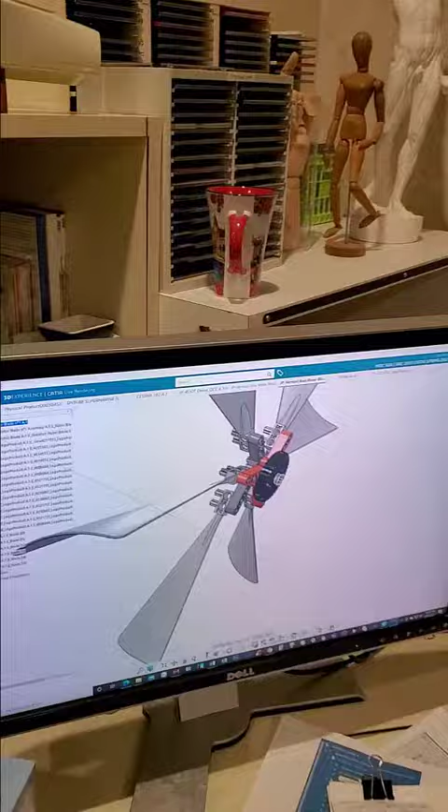I'm here with Pepe Peralta and we're looking at a propeller on Catia V6.

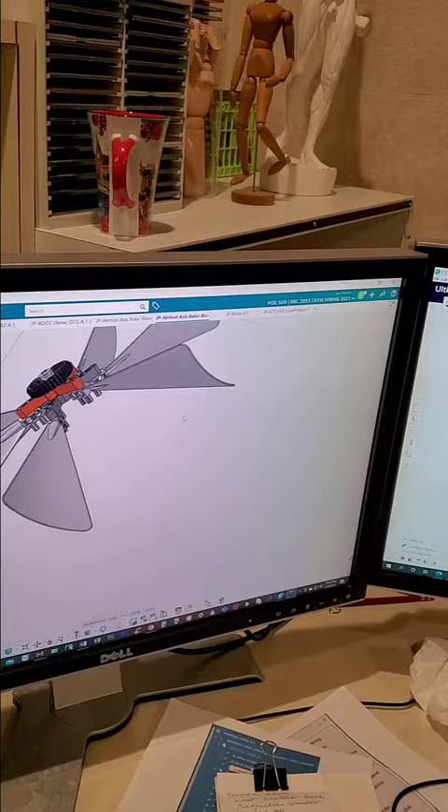We're experimenting with the process of 3D printing this propeller. Zoom in there, Pepe, so we can see the details. Nice, there's a lot of detail in that propeller.

Over here you can see where we basically exported the model and brought it into the Ultimaker Cura. And here are some of Pepe's models of his boat, so you can see Pepe is a fanatic of making models and working in 3D.

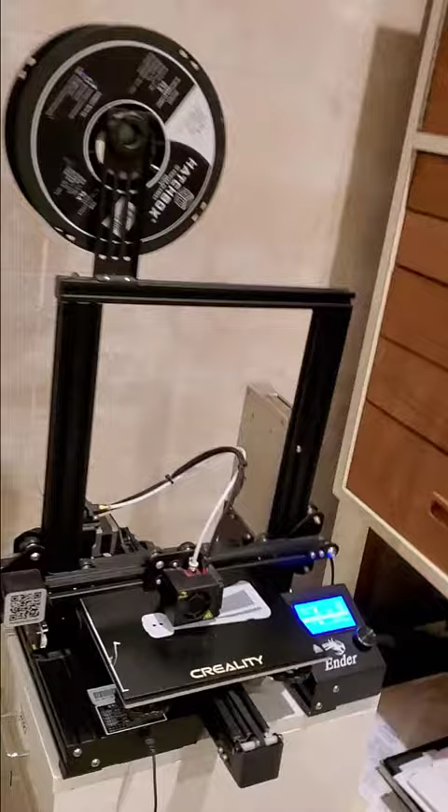Over here we see the machine actively 3D printing the part that we're currently working on now. Pepe is going to 3D print that propeller, and in about maybe 24 hours, maybe 3 days, sometime from, no pressure Pepe, we should have the full model 3D printed, and we'll be able to basically create this model.

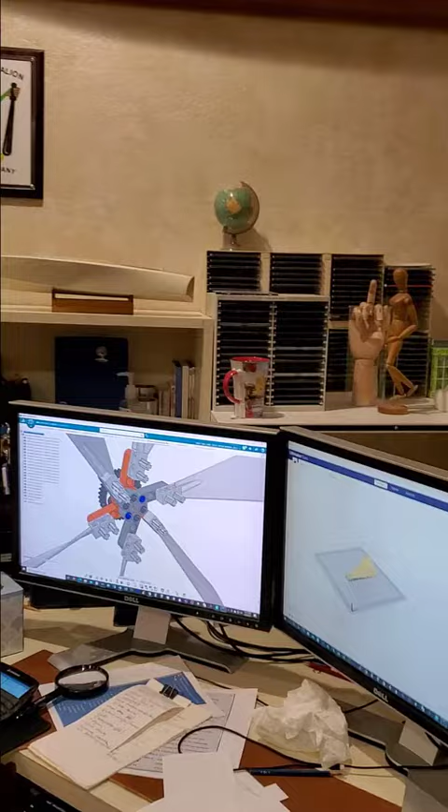So technically, there's the model in 3D on the computer, and over here is the manufacturing production section where it is actually actively making the parts. So this is a true assembly that we are making in Catia, and this is Chicharo 3D printing.

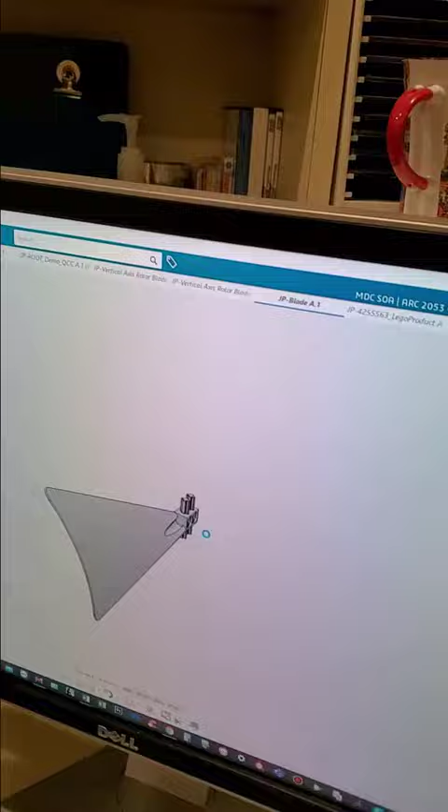Alright, so we can see the actual part here, and this is Catia 3D printing, which gives us all the formats that the Ultimaker basically needs in order to make the part.

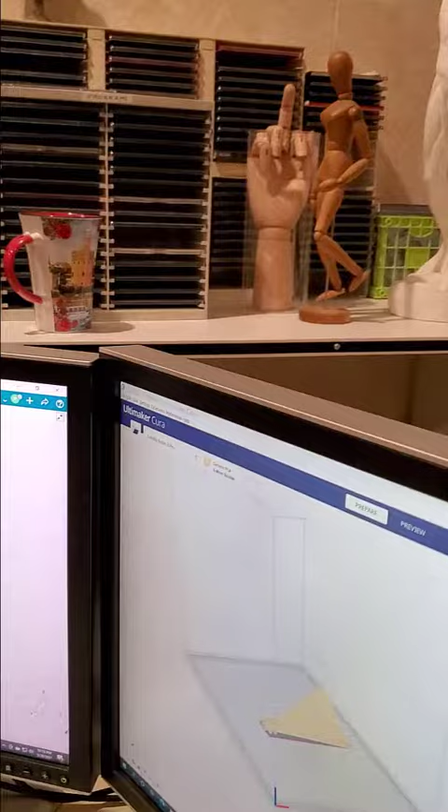So everything from STL - what are the three formats? We have STL, yeah, these are the two parts here. There's STL, 3MF, what's the other two? 3MF and AMF are the three formats.

All three of these we're getting from Catia with no problem. Fantastic, and for it being our first try, and it looks like, again, this is our first model that we're printing, and I think we're going to come out of it successful.

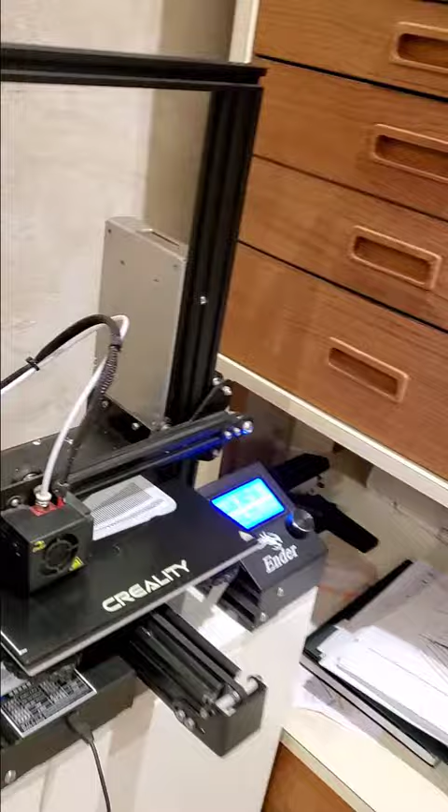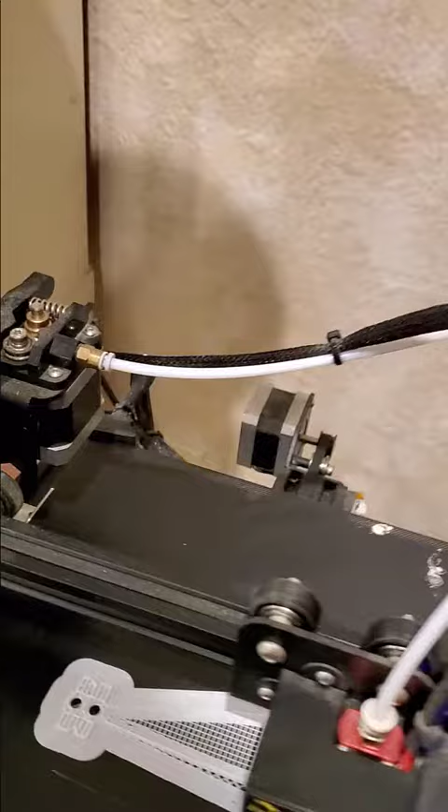What it's currently doing right now is printing a support structure for the propeller. The hatch pattern you see is basically a support structure that it's creating for the model, and you can see the level of detail that it's actively making right now. So we're looking forward to seeing this part come alive.